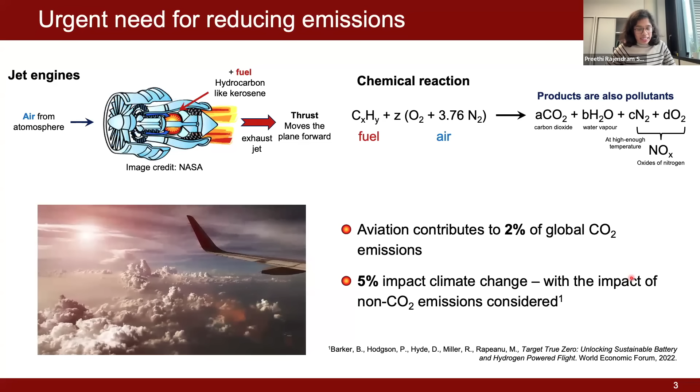This makes it important to develop techniques that limit their production at source, which essentially means altering the way we burn. We can think of two strategies to reduce emissions: first, by using low or zero carbon fuels that limits or eliminates the production of CO2; or secondly, improve the combustion efficiency of these engines so we can emit less.

Let's first look at the first strategy, which is on using low carbon fuels. So what if we stop burning hydrocarbon fuel and instead just use hydrogen? That way, there are no carbon dioxide emissions. We still have oxides of nitrogen, which has to be dealt with, but at least carbon dioxide is eliminated.

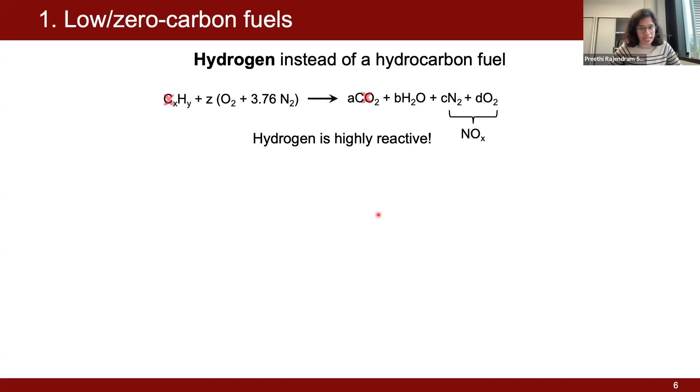The good news is we don't have to learn to burn hydrogen because hydrogen gas is highly reactive. However, the first challenge due to its high reactivity is the propensity to flashback. If we look at this comparison of flame speed in blue between hydrogen on the left and kerosene on the right, we can notice that at a particular equivalence ratio, the flame speed of hydrogen is nearly 7 times higher than that of kerosene.

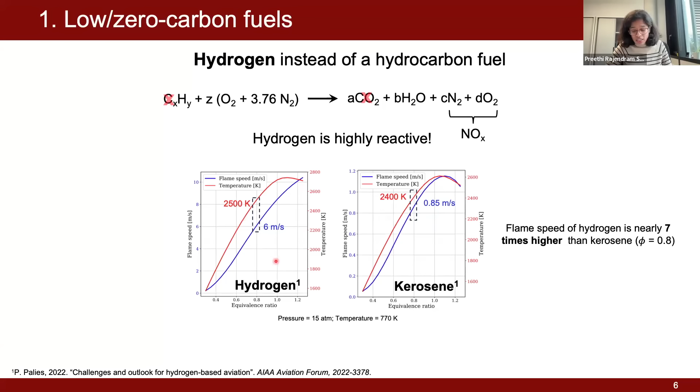So it is not safe to operate hydrogen in a premixed configuration as it can cause flame flashback. It also burns at a slightly higher temperature, which might favor the emission of oxides of nitrogen. So the question is, how do we burn hydrogen in a controlled and safe way? To prevent flame flashback, we need to operate hydrogen combustors in a partially premixed fashion.

One way to achieve quick and well-mixed reactants for hydrogen combustion is through a jet-in cross-flow injection. In this technique, we have a cross-flow of air and a high-velocity hydrogen jet is injected perpendicular to it. Since we are only mixing air and hydrogen at the region where it ignites, there is no possibility of flashback, so it is safer to operate. And further, because of the higher diffusivity and velocity of the hydrogen jet, there will be good mixing between air and the fuel. With this technique, we can also burn lean, thereby reducing NOx emissions.

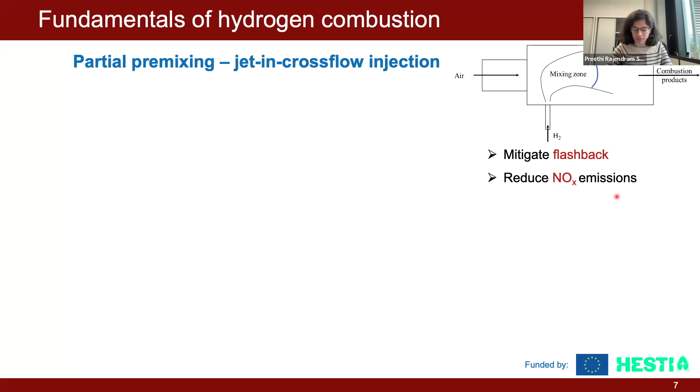To study this, at the University of Cambridge, we developed a canonical configuration of a jet-in cross-flow injection technique. In the schematic that you can see here, air flows from the bottom and exits through the top. There are a series of 3 jets of hydrogen that are injected perpendicular to this airflow.

In such a configuration, the critical parameter is the velocity of the hydrogen jet compared to the velocity of airflow, and this parameter is called the momentum flux ratio. A good thing about having such a canonical configuration is we can do a systematic sweep of this critical parameter, which is the momentum flux ratio.

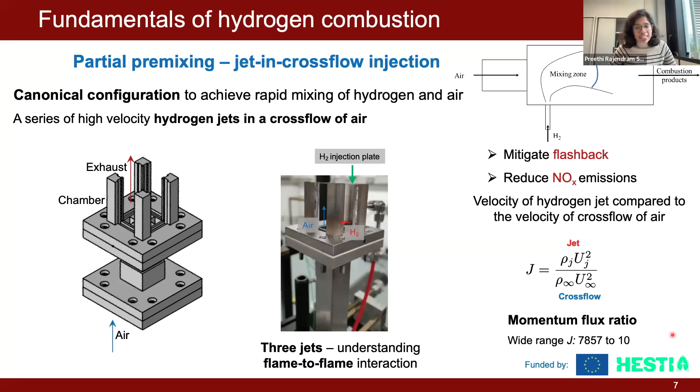For example, for this study, we changed the momentum flux ratio from 10 all the way to 7,800 to understand the flame behavior better. This enabled us to study a wide range of flame dynamics associated with the jet and crossflow configuration.

For this study, we looked at 60 different momentum flux values, but today I'm only going to focus on one particular crossflow velocity, just 4.6 meters per second, and 3 different jet velocities ranging from 310 to 78 meters per second. This is just to show an example of the rich flame dynamics that this configuration exhibits. These combinations of jet and crossflow velocity result in a momentum flux ratio between 300 and 20.

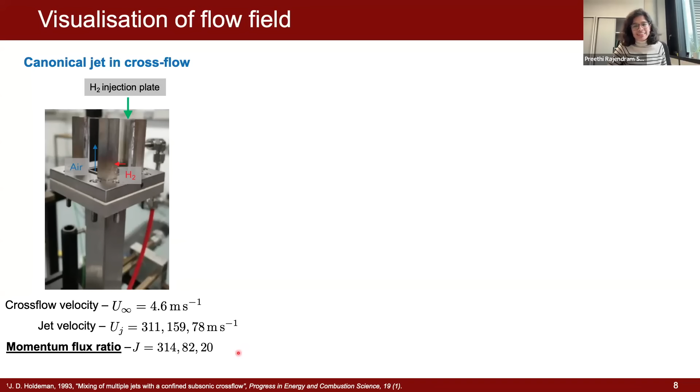First, to visualize the jet, we use the Schlieren technique under non-reactive conditions. For this kind of configuration, Schlieren is well known to provide qualitative information on the mixing between the jet and the crossflow.

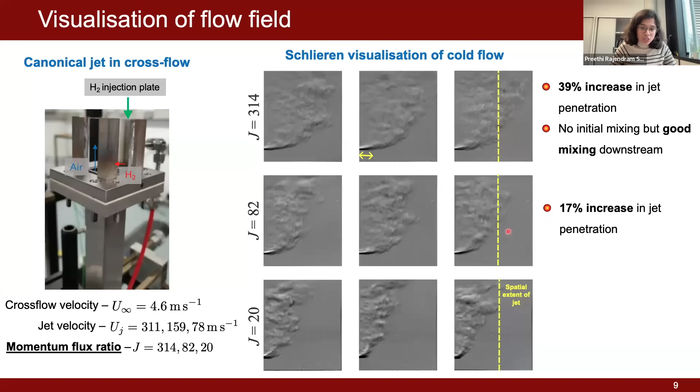As we decrease the momentum flux ratio, the mixing is also expected to gradually decline, and the lowest mixing can be expected at the lowest momentum flux ratio. Now let us look at how this difference in the flow field as well as the mixing at different momentum flux ratios affects the flame structure.

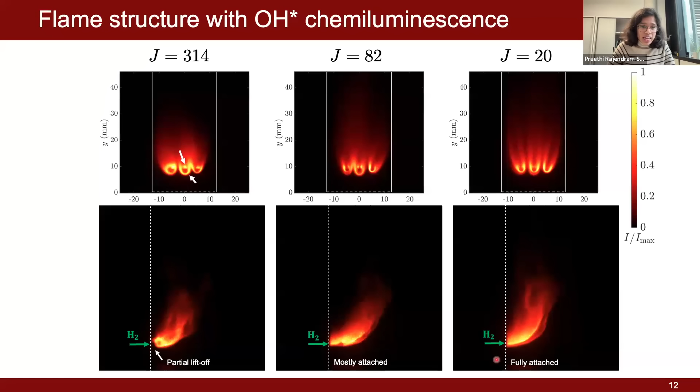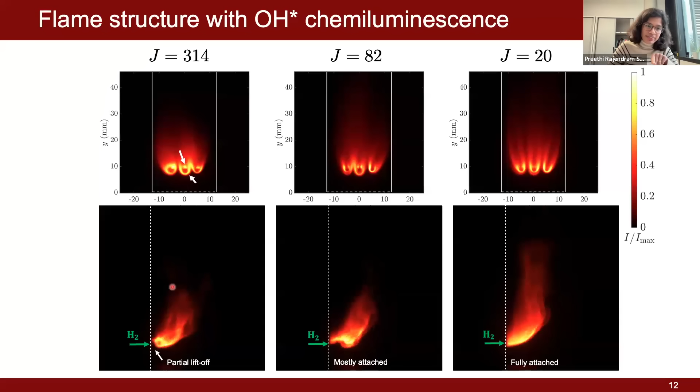When we decrease the momentum flux ratio, there is still a minor pinch off that can be observed, but the flame remains mostly attached at the injection location. And at the lowest momentum flux ratio, the flame fully remains attached. So this lift-off seen at the highest momentum flux ratio, along with marginal attachment on the leeward side, is what appears as this bright spot at the center of the image on the front view of the jets.

To understand the reason behind the different flame topology, we also carried out large eddy simulations of the jet and cross-flow configurations. These simulations were validated with cold flow Schlieren as well as flame chemiluminescence, and the CFD showed a good match with the experimental results.

At the highest momentum flux ratio, close to the injection location, the jet velocity is really high. If we recall the Schlieren image, along the jet stem we noticed there was no diffusion of hydrogen into the cross flow along the windward side. This is what leads to the partial liftoff of the flame that we observed on the flame chemiluminescence.

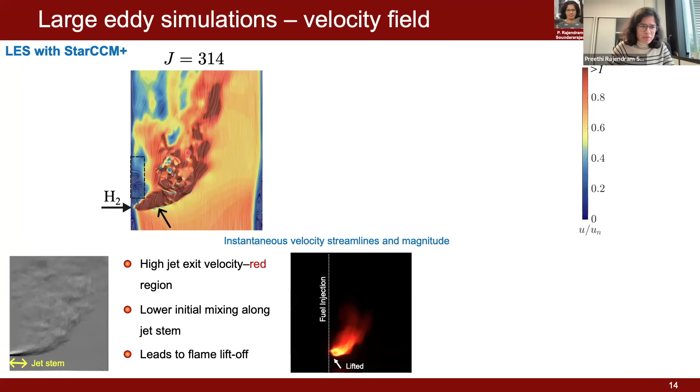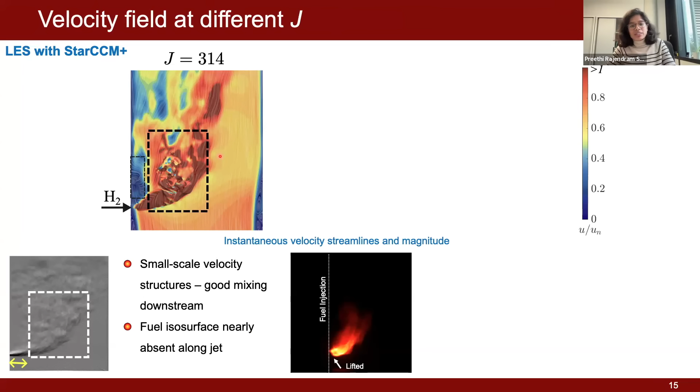However, along the downstream of the jet, we can notice small scale velocity structures. Because of these, coupled with the larger penetration depth, we can expect rapid mixing downstream of the jet. So although the initial mixing is expected to be poor, due to vigorous and fast mixing downstream, no fuel is expected to be present further downstream in the chamber, and this can lead to the formation of a short and compact flame.

Now let us take a closer look at what's happening on the lee side. Here we can notice that the streamlines show a minor recirculation zone. This is because close to the jet stem, due to the higher momentum, the jet essentially behaves like a bluff body without interacting with the cross flow. This effect, coupled with the wake vortices close to the wall, results in the formation of a low velocity recirculation zone, which might potentially trap hydrogen and air and also some free radicals from the nearby adjacent reaction zone.

For example, at the bottom we see the mole fraction contours of the perhydroxyl radical, which plays a crucial role in the chain branching reaction of hydrogen combustion. Just above the injection location on the leeward side, we can see a strong presence of the HO2 radical trapped here. From this, we can confirm that there is some trapping of free radicals in this location on the leeward side, which helps in marginally attaching the flame on the lee side close to the tip.

Essentially, at the highest momentum flux ratio, the flame remains lifted on the windward side due to higher initial momentum of the jet, but attached on the lee side due to the formation of a low velocity recirculation zone.

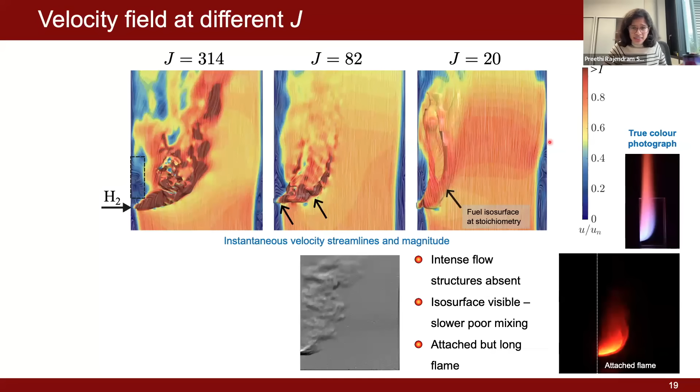At the lowest momentum flux ratio case, the magnitude of the jet close to the exit is much lower, which results in good attachment of the flame to the injection location. We can also see this embossed isosurface that extends along the jet trajectory, which indicates that mixing at the lowest momentum flux ratio is slow and gradual. This poor mixing, with the absence of turbulent structures in the velocity field, results in a long flame caused by gradual mixing along the jet trajectory.

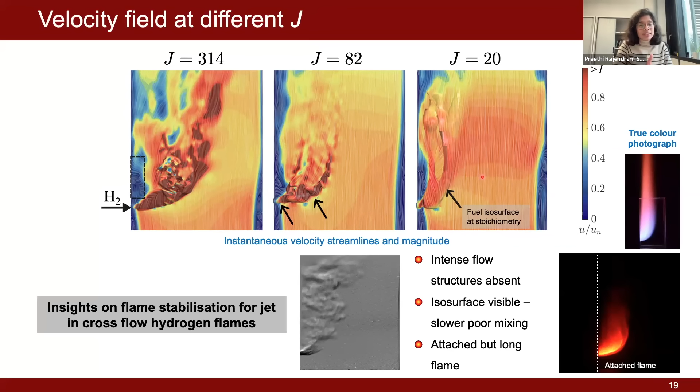In short, what we have seen here is that a canonical jet-in-cross-flow configuration can exhibit rich flame dynamics when the momentum flux ratio is systematically varied, and this information can be used to guide the building of partially premixed hydrogen configurations. Now let's move on to the second strategy of reducing emissions, which is by improving combustion efficiency.

One of the ways to improve combustion efficiency is through plasma-assisted combustion. If we apply a high-voltage electric pulse in an air and fuel stream, it can produce a small region of bright plasma, and this plasma can help in several ways. For example, it can break down the oxygen in air and also break down fuel molecules to produce radicals such as CH and OH before the flame zone.

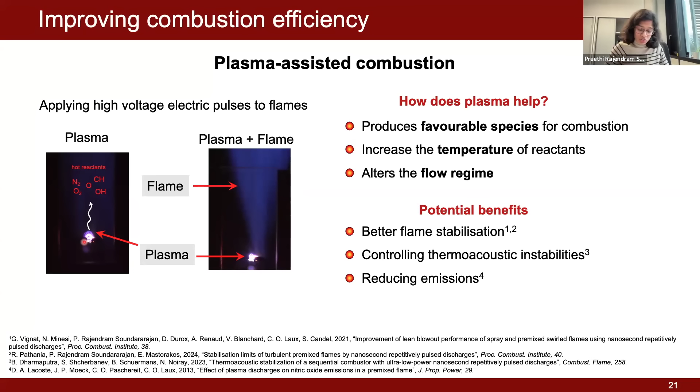Further, it can also cause local heating of the gas stream and favorably alter the flow regime. All this can help stabilize combustion with lower quantities of fuel than a conventional system. This can also result in low emissions through complete combustion of fuel and air by producing free radicals prior to the combustion zone. At the EM2C lab in France, we applied plasma on a swirl combustor that operates with liquid fuel, so this configuration has quite some practical relevance.

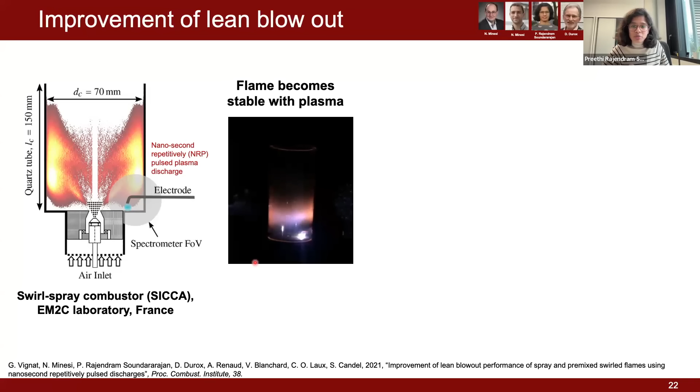Here we are going to see a video of a flame. This flame initially flutters, and the moment the plasma is turned on, the flame gets stabilized.

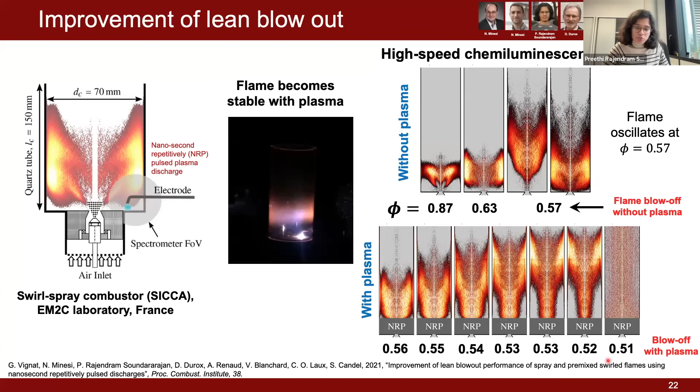On the right side, we look at high-speed chemiluminescence images, on top without plasma and on the bottom with plasma. As we decrease the equivalence ratio without plasma, at an equivalence ratio of around 0.57, the flame begins to oscillate and eventually blows out. However, when we turn on the plasma at this equivalence ratio, the flame stabilizes and we can go all the way to 0.51 before it eventually blows off. So with the use of these high voltage plasma discharges, we can extend the stability limits of a swirl spray flame.

If we take a closer look at what happens to the flame close to the oscillations, initially the flame oscillates, but the moment the plasma is turned on, it gets stabilized.

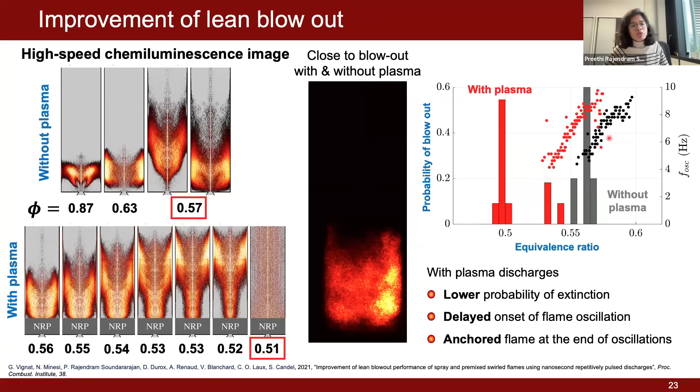In summary, with plasma discharge, the probability of lean extinction can be lowered with swirl flames. The plasma does this by delaying the onset of flame oscillations and anchoring the flame at the end of the oscillations. These effects combined together can contribute to extending the lean blowout of these flames.

Okay, so we saw that we can extend the stability limits of a swirl stabilized flame with plasma discharges. So the next natural question is, can we eliminate the use of conventional flame stabilizers such as bluff body or swirl, which imposes a pressure drop to the flow, and instead stabilize the flame solely with these plasma discharges?

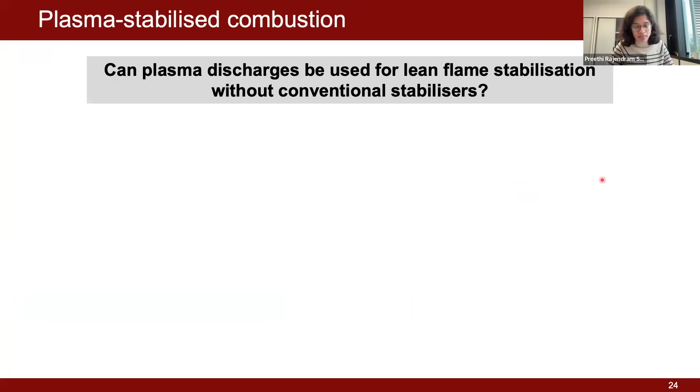To answer this question, we developed a canonical configuration at the University of Cambridge that consists of a square cross-section channel, and air is pre-mixed with fuel and enters through the square channel. In the chamber, two sets of tungsten electrodes are placed, between which high voltage electric pulses are applied.

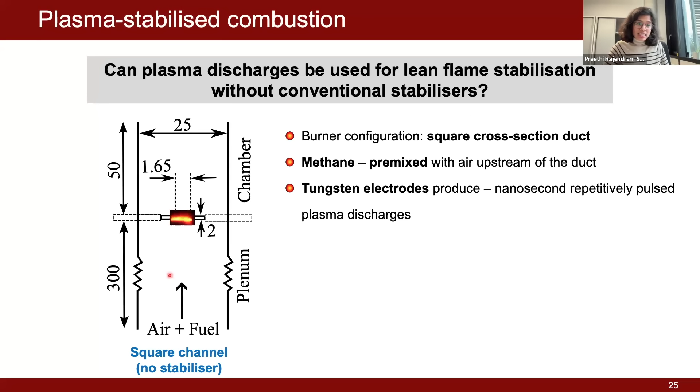From the schematic, it can be seen that in this combustor, there is no other stabilizer like bluff body or swirler to hold the flame. There are only these tungsten electrodes in the chamber that produce plasma discharges.

So now if we look at the video of the experiments, what we can see here is the bright spot, which is the plasma discharge, and a blue flame stabilized on top of it. So as we can see in the chamber, there are no stabilizers.

So this is quite novel because most of the studies in this area use plasma to extend lean blowout limits, like what we saw earlier with the swirl flames. But in this work, we have achieved flame stabilization only with these discharges.

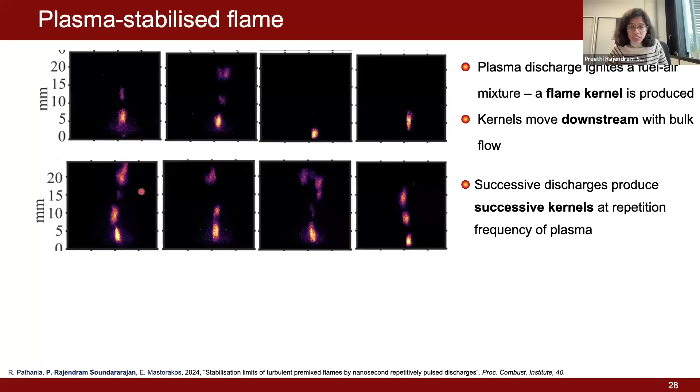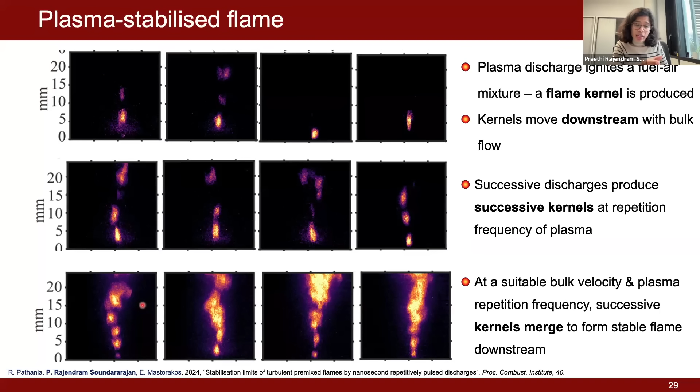As the plasma discharges are repetitively produced, successive kernels are formed at the repetition frequency of the plasma. And as we keep increasing the repetition frequency, these kernels are produced more rapidly. So at a critical point, when the repetition frequency is higher than the bulk flow time scale, the kernels can merge with one another to form a continuous flame sheet. This is the stable flame that is stabilized solely with the plasma discharges.

Essentially, there are three possible regimes in a plasma stabilized flame. In the first, we have a stable flame where the kernels merge with one another to form a continuous flame sheet. Second, where the kernels are repetitively produced but cannot merge with one another due to higher bulk flow velocity. And the third, in which kernels are extinguished as and when they are formed.

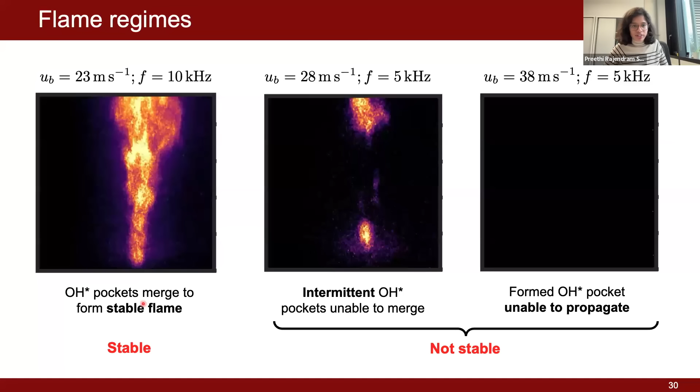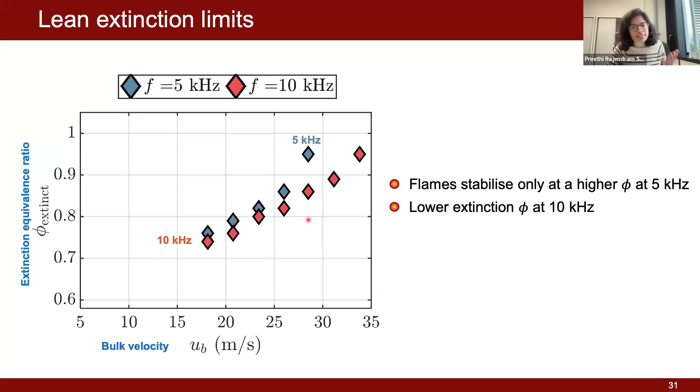So as we can see, the extinction equivalence ratio is higher at 5 kilohertz compared to 10 kilohertz. This indicates that when we increase the repetition frequency, we can stabilize flames at a leaner condition. So does this mean we can stabilize the flame at lower and lower equivalence ratio as the repetition frequency is increased? The answer is actually no.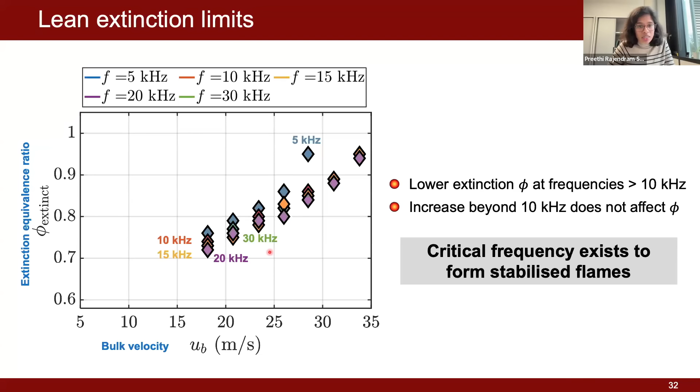This means that there is a critical frequency that exists, which in this case is 10 kilohertz, beyond which any increase in repetition frequency does not affect flame stabilization.

The reason for this is because the mechanism of flame stabilization is primarily through merging of flame kernels. For example, as we move from 5 to 10 kilohertz in this particular case, we make the kernels merge with one another, and thus an increase in repetition frequency contributes to flame stabilization.

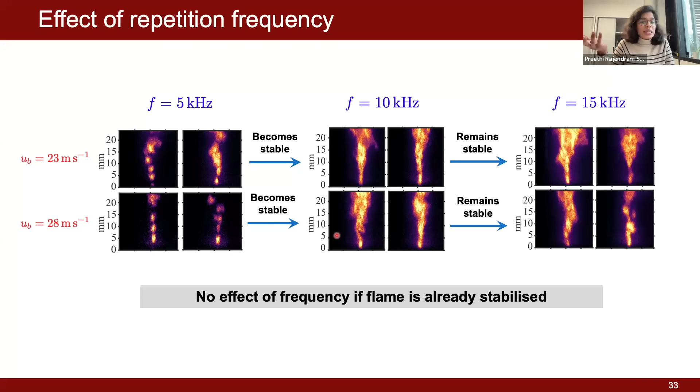However, as we increase the repetition frequency to 15 kilohertz, the flame kernels still remain merged, and this increase in frequency does not particularly contribute to the formation of a stable flame.

So in addition, we also carried out an experiment to compare the lean stability limits of these plasma stabilized flames with that of a conventional bluff body stabilized flame.

Here on the left, we see the schematic that we already saw for the plasma stabilized configuration. In the chamber, we only have these tiny tungsten electrodes, so the flow blockage is quite negligible. But on the right side, we see a V-gutter bluff body configuration that presents a 45-degree angle to the incoming bulk flow.

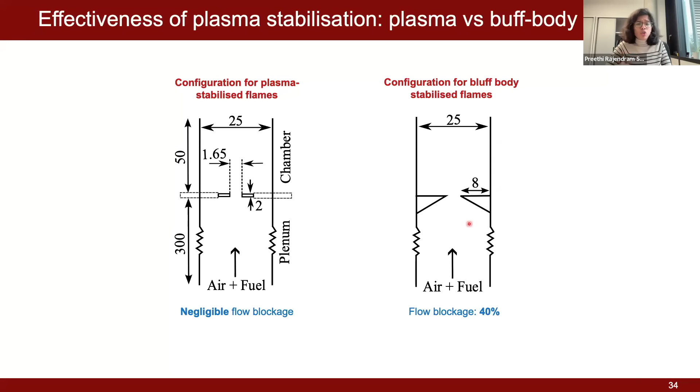This V-gutter configuration results in a flow blockage of about 40%. In this image, we see the extinction equivalence ratio on the y-axis and bulk velocity on the x-axis. The black stars on this curve correspond to the extinction limits of bluff body flames, and the colored diamonds correspond to a plasma stabilized flame.

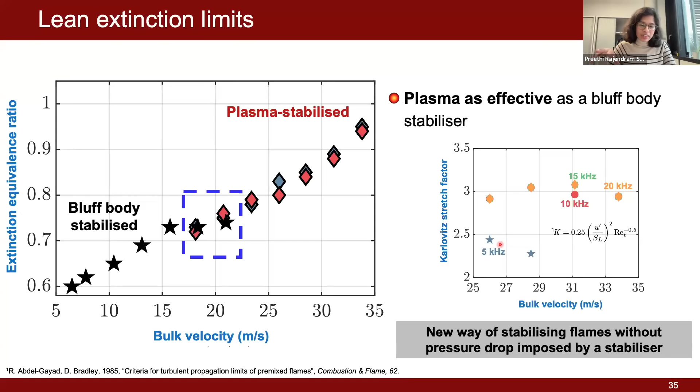What we can see here is that at certain operating conditions, plasma can be as effective as bluff body in stabilizing flames. From the experimental results, we also developed a correlation based on the Karlovitz stretch factor, which can help predict the stabilization limits of these plasma stabilized flames at other operating conditions and fuels. In short, this shows that we now have a new way of stabilizing flames solely with plasma discharges, thus eliminating the need for conventional stabilizers.

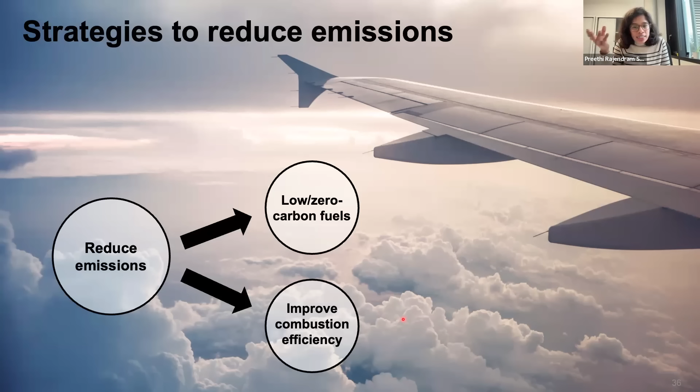So we have looked at both ways of reducing emissions: first by using low carbon fuels, then by improving combustion efficiency. Essentially, we have brought in some changes to the flame in the form of fuel, the kind of injection, or the way in which flames are stabilized. When we make any change to the flame topology, sometimes we may end up encountering certain undesirable instabilities in the flame, and one such instability is the phenomenon of thermoacoustic instability.

Let's take the case of the jet in crossflow hydrogen flames we looked at earlier. At certain operating conditions, these flames become unstable, resulting in transverse flame oscillations. If we closely look at these white circles on the video, we can notice that the central flame alternately touches the left and right flame close to the tip. This results in the shedding of flame pockets alternately, which is not good, because essentially the flame becomes unpredictable.

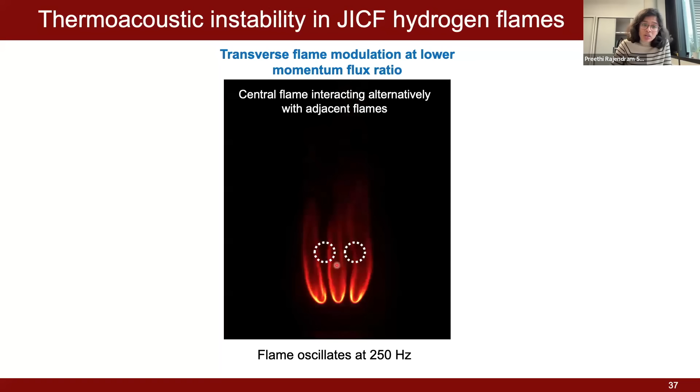This is happening because the flame has coupled with the acoustics of the air injection tube, due to the phenomenon known as thermoacoustic instabilities. So this brings us to the third part of the talk, which is on tackling adverse effects due to thermoacoustic instabilities.

In a broad sense, these instabilities occur because the flame emits sound, and when we confine this flame in a chamber, which is typically the case in engines, these sound waves can get reflected back and forth. When this frequency matches the resonant frequency of the chamber, there can be very strong pressure oscillations, which in turn affect the flow of fuel and air. The flame gets affected, the noise gets affected, and this keeps happening in a loop.

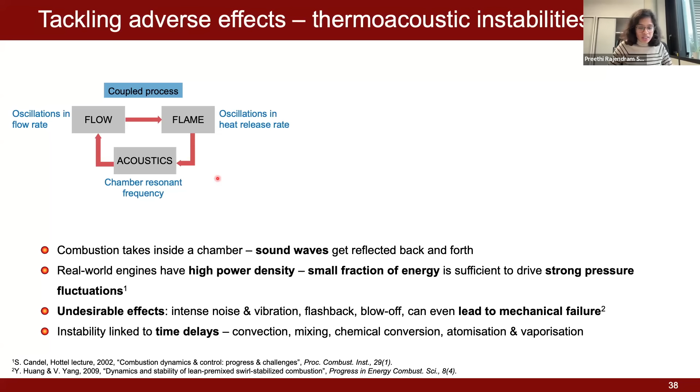I'm going to show a video of a lab scale combustor here that undergoes these instabilities.

There is, of course, this intense sound that is emitted by this combustor due to these instabilities. But what we can also notice is that some of the flames blow out because of this phenomenon. If we consider real engines, they have very high power density, on the order of gigawatts, and even 1%, a very small fraction of this thermal energy, is sufficient to drive really strong pressure pulsations.

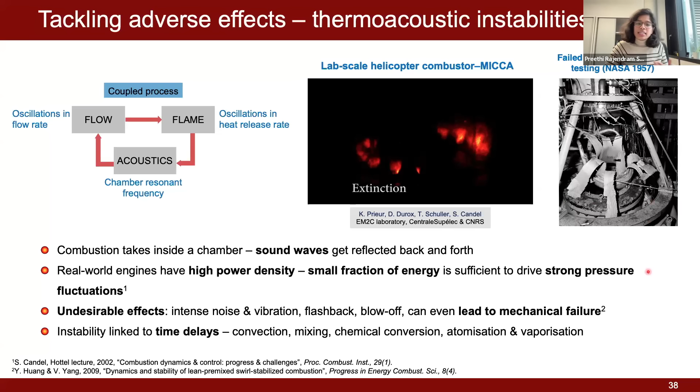Because of these instabilities, we can have several undesirable consequences: the intense noise we just heard, blow off, and sometimes even mechanical failure. For example, in this picture here, we can see a rocket motor that is completely torn apart because of thermoacoustic instability.

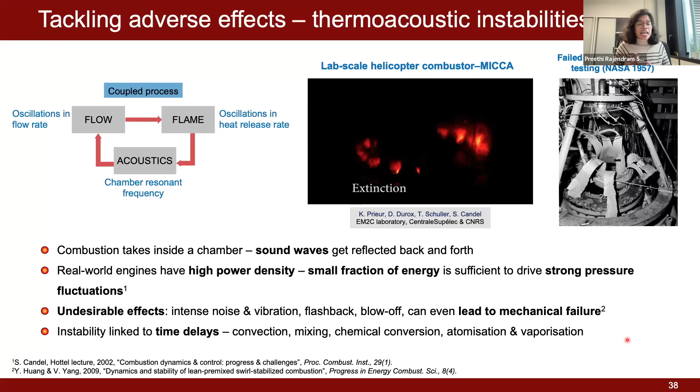These instabilities principally happen due to different time delays involved in the combustion process. For example, there is a time delay associated with the convection of fuel and air, a time delay associated with mixing, as well as with the chemical conversion itself. If you use liquid fuels, there are additional time delays due to atomization and vaporization of fuel droplets. If these time delays are sufficiently large, it can lead to unstable operation.

So it is important to understand these instabilities to develop control techniques and prediction tools that can be used as we transition towards low carbon fuels with newer technologies.

So we studied the self-sustained oscillations on the annular combustor, namely MICCA, at the EM2C lab in France. It is important to study these instabilities in annular configurations because real configurations have an annular geometry. I'm recollecting the feedback loop here again that happens between combustion and acoustics, which leads to strong self-sustained oscillations.

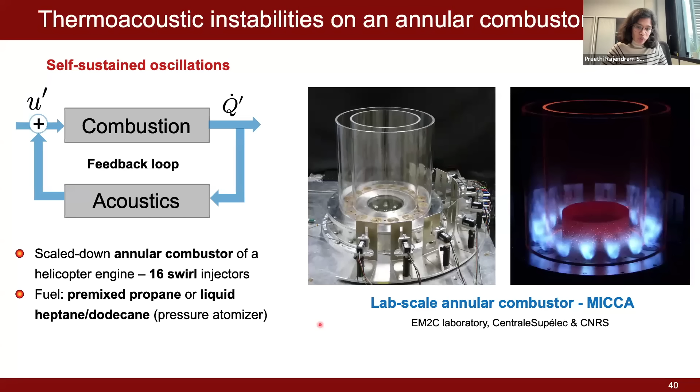Here we can see a picture of MICCA, which has 16 swirling injectors. The combustor can typically be operated with a lot of different fuels, and for this study, we focused on gaseous premixed propane as well as liquid heptane and dodecane that are delivered as spray in the chamber through a pressure atomizer. Of course, these are still hydrocarbon fuels, but the insights that we gather from these fuels would be directly relevant to other low carbon fuels such as hydrogen and sustainable aviation fuels.

So what we see here is the stability map of this MICCA annular combustor at different thermal power and equivalence ratio. On the left, we have the premixed propane. In the middle, we have the liquid heptane, which is a volatile fuel. On the right, we have liquid dodecane, which has properties very close to that of kerosene.

If we look at the stability map for the case of propane, we see that with propane, this combustor is unstable at most of the operating conditions. These colors show the amplitude of instability. As we move from blue to green to yellow to red, we go up in the amplitude of instability. So at propane, we barely see any blue regions.

If we change to heptane, then we can start to see some blue regions, but these are still quite rare. The operating conditions at which stable operation occurs is still quite rare. And heptane exhibits wide instability bands, and the highest amplitude of instability also occurs with heptane.

As we move to dodecane, we see a lot of blue regions now. So the combustor is stable at a vast majority of points. The instability bands are also narrower, and the high amplitude regions are quite narrow as well. So from this, it is clear that when we change the fuel, the instability behavior changes completely. This makes it important to understand and develop control techniques before the design stage of low carbon combustors.

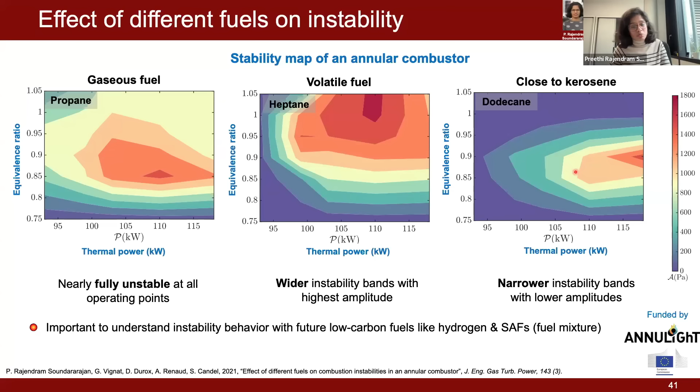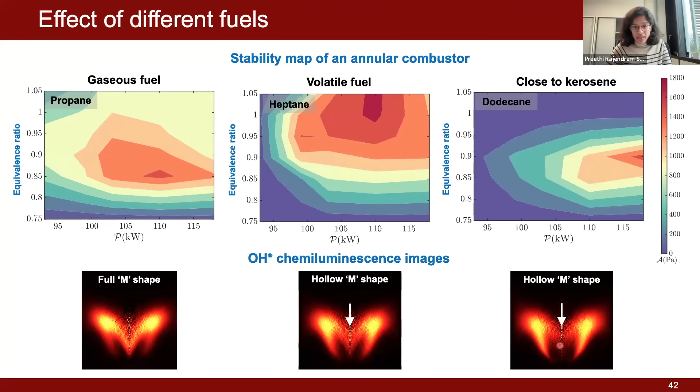If we look at the flame topology in each case, we can see that with propane, the flame takes a shape of a full M. With heptane and dodecane, we see a hollow M. Essentially, the central luminous region that we see with propane is nearly absent with heptane and completely absent with dodecane. So the flame topology is changing, but how does it manifest as a change in the instability behavior?

To do this, what we can do is we can externally modulate a stable flame and measure its response. On the left, what we see here is the feedback loop that we know from before, which caused the self-sustained oscillations in MICCA. Now we want to decouple this loop and minimize the combustion acoustics interaction to a level where this feedback loop doesn't exist anymore, so that the flame is fully stable.

Once we have a stable flame, we can modulate this flame externally by using loudspeakers, for example, and see how the flame responds to acoustic perturbations of different amplitude and frequency. Essentially, what we can do is some kind of a sensitivity study with respect to acoustic frequencies and amplitude to understand what are the critical frequencies that we need to avoid in our combustor.

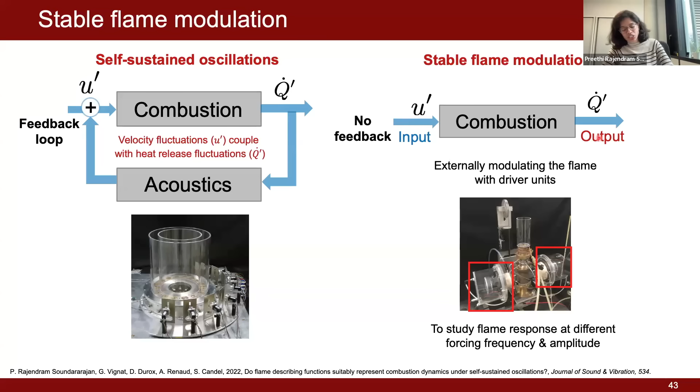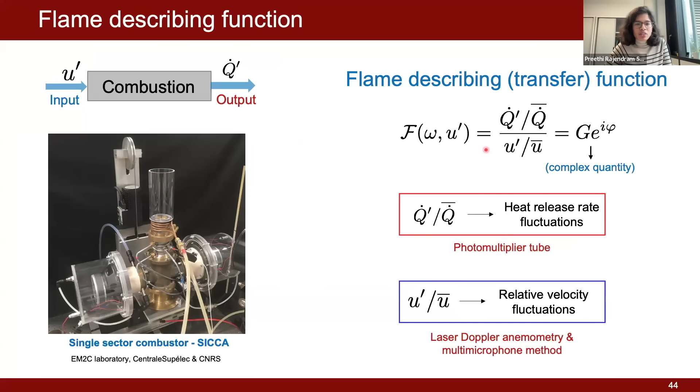The idea behind this is to represent the flame response in terms of a black box describing function that relates an input, which is the flow perturbations, to an output, which is the heat release rate perturbation. To do this external modulation, we used a single injector combustor, which is representative of the annular combustor. Our black box describing function will have heat release rate modulations in the numerator, which is the output, and velocity modulations in the denominator, which is the input. So this describing function has a gain and a phase, and it is a complex quantity.

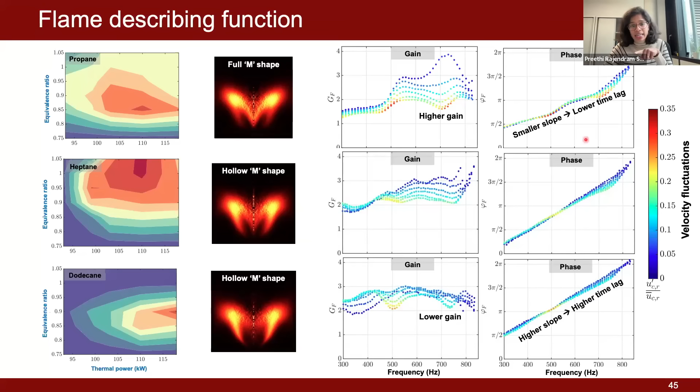On the phase curves, we can see that the slope is different with different fuels. With propane, the slope is smaller, so we can expect a lower time lag. And with liquid fuels, the slope is higher, so the time lag is also expected to be higher.

So once we have information on how the flame responds to different input fluctuations, we can use this information in a low order modeling framework to represent the flame. This model can then be used to predict when an instability will happen in the annular combustor.

Based on the Rayleigh criterion that gives the condition for instability, and combining this with a describing function and injector impedance, we can come up with these bands of instability. So what this band of instability states is that if the phase between our velocity fluctuations and heat release rate fluctuations is within this band, then our annular combustor is likely going to be unstable.

Now let us see how this model predicts the instability behavior of our MICCA annular combustor with different fuels. So we have the instability band marked as a gray box here. We also see the phase evolution for three fuels: propane in red, heptane in blue, and dodecane in green. We know that the natural frequency of this annular combustor is around 750 Hertz.

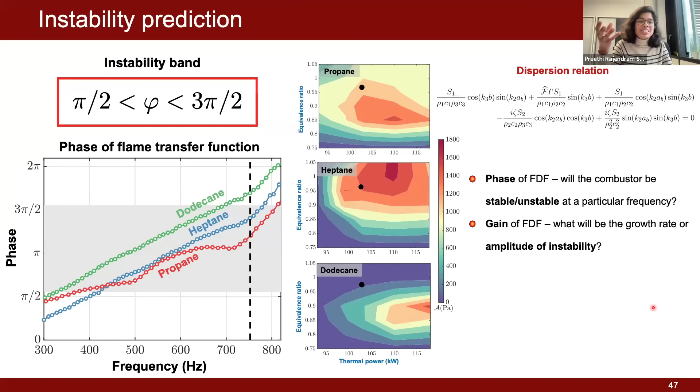Of course, I only spoke about the phase of the describing function, but the gain also plays an important role. Essentially, we can write down a dispersion relation and represent the flame in terms of a describing function in this dispersion relation. When we solve for this dispersion relation, the phase of the FDF will correspond to telling us whether the combustor will be stable or unstable at a particular frequency, and the gain will give information on the amplitude of instability.

So we previously saw that when we changed the flame topology, we changed the instability behavior. Now the question is, can we use this information to our advantage and tailor the injection in such a way that we suitably modify the time delays to make our combustor stable?

For example, here we see three different spray profiles. In the top one, at the exit of the injector, the spray is nearly uniformly distributed along the radius. In the middle one, there is some spray droplets close to the center. And in the lowermost one, there is no droplet present at the center of the injector.

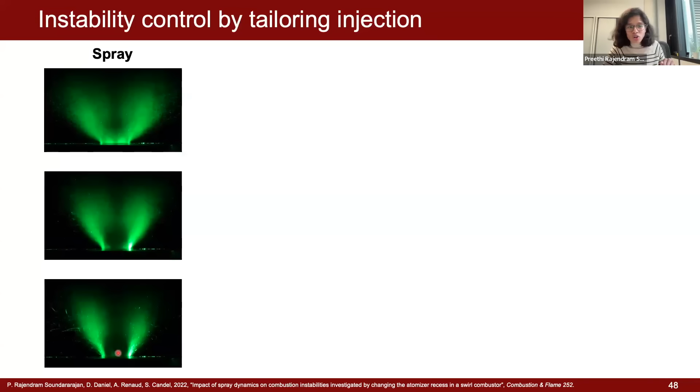So of course, when we have this variation in the spray profile, we expect the flame topology to be different as well, and that's what we see. Because the flame topology is different, we are going to have a different describing function. So I have also marked these gray bands, which are the instability bands that we previously saw, and we also see the gain and phase evolution for all three cases.

So if we look at the topmost case, what we notice is that the phase curves lie within the instability band only for a selected frequency range, between 550 Hertz to 800 Hertz. The gain is also more or less lower and remains constant. As we move to the second spray profile, we increase the range of instability frequencies, and the gain also increases. At the lowermost case, we have a very wide range of frequencies at which the combustor can be unstable, and the gain is also quite high.

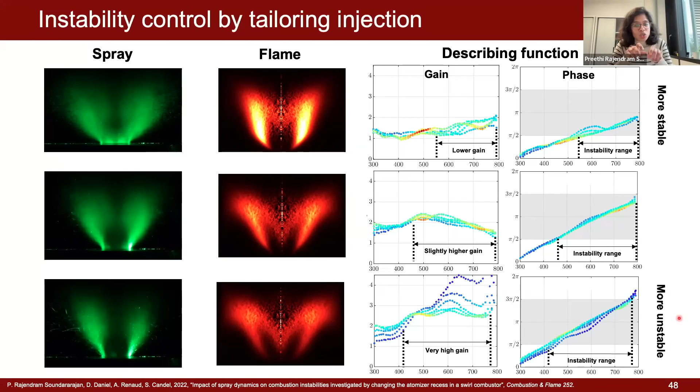Essentially, the topmost flame configuration corresponds to a flame we can expect to be stable at a lot of frequencies, and the bottommost one will be the most unstable combustor for the range of frequencies considered. In essence, this work shows that we can tweak the fuel injection to our benefit and derive instability control techniques.

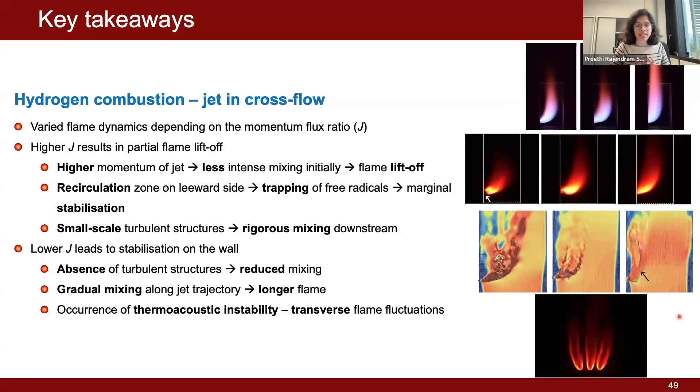At the lower J value, these turbulent structures were absent, so the mixing was also reduced. There was gradual mixing along the jet trajectory, which resulted in a long flame. This is also the condition which led to the triggering of thermoacoustic instabilities, resulting in transverse flame fluctuations. So ideally, what we want is a configuration in between the two, which can cause good mixing, leading to a stable flame while avoiding these undesirable thermoacoustic instabilities.

Then we looked at the case of plasma-assisted combustion and how it can help extend the lean blowout limits of a swirl combustor operating with liquid fuel. Plasma can help in stabilizing flame oscillations that occur close to blowout. Due to plasma, the onset of flame oscillation was delayed, leading to a lower probability of extinction.

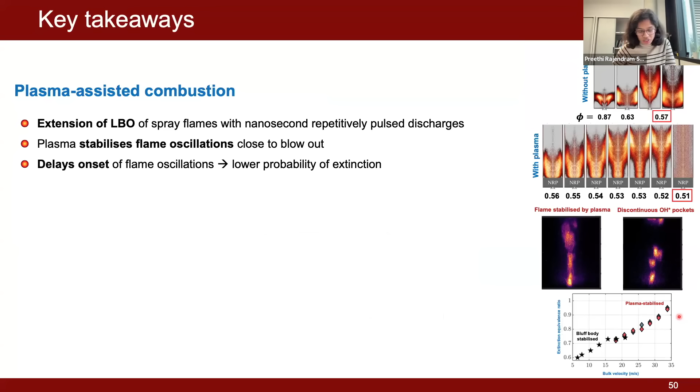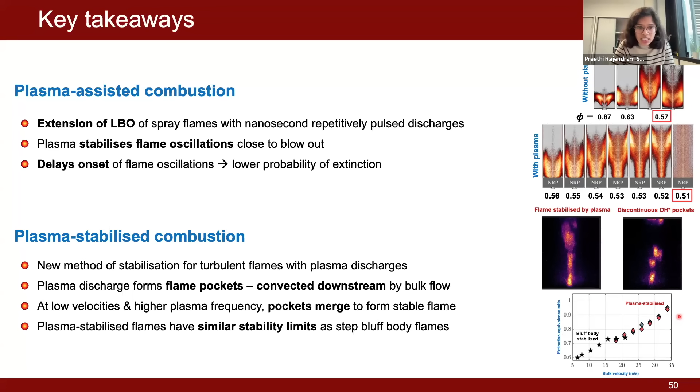We also further extended this idea of plasma-assisted combustion and developed a new method of plasma-stabilized combustion. We saw that each plasma discharge produces a flame kernel that can merge with one another when the repetition frequency is high enough, resulting in the formation of a continuous and stable flame sheet. These flames can have stability limits as good as a conventional bluff body configuration, so this can be used as a replacement for traditional stabilizers that impose a pressure drop to the flow.

We also saw that when we bring some modification to the flame, in terms of changing the fuel or the stabilization method, it can inadvertently lead to thermoacoustic instabilities. When we compared a gaseous hydrocarbon fuel with two liquid hydrocarbon fuels of varying volatility, we saw that the instability boundaries and frequencies were altered due to a change in flame topology. We derived a model based on flame response to external acoustic modulations, and this model successfully predicted the instability behavior of the annular combustor. This model can be used when designing combustors that operate with low carbon fuels.

We also saw that the change in flame topology and time delay can be used to our advantage by tailoring the injection location, thereby helping develop stable combustor configurations.

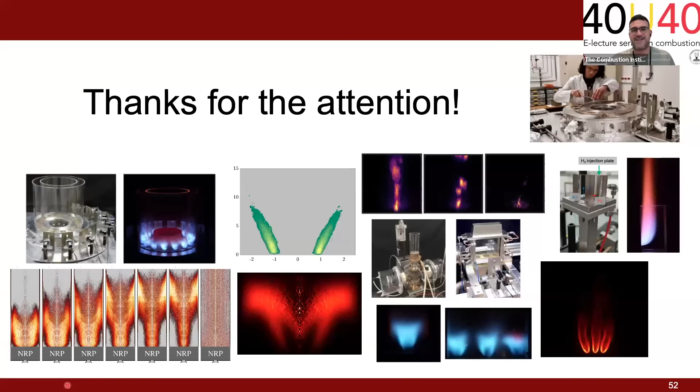Yes, thank you, Preethi, for this very nice talk. I would have a question regarding the plasma work that you presented. When the pockets are ignited and they merge, so a flame can be stabilized, how did you ensure that the electrodes were not acting as bluff bodies? How did you measure the temperature on the electrodes, or did you have a special visualization device to see if there is no bluff body stabilization?

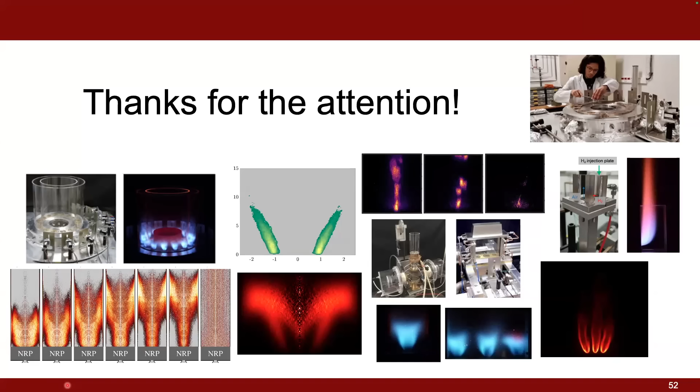Okay, thank you. So did you make a criterion based on a Reynolds number or a critical velocity to ensure a distinct stabilization mechanism? We did not try that because all we wanted was to avoid the rod stabilized configuration and only focus on the plasma stabilized configuration. But that could certainly be done, because that depends mainly on the bulk flow velocity. Okay, thank you.